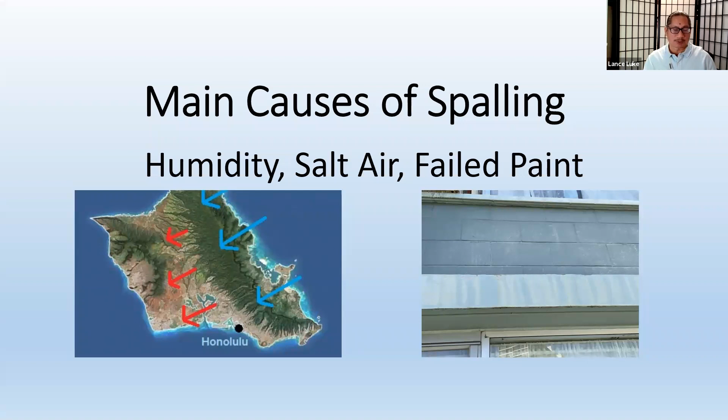So how do we determine whether there's spalling of the buildings, or let's say we know there's spalling, but how do we determine how much spalling there is and what the cost is to repair the spalling? So there's what's called a condition survey, and the survey is a method to determine the quantities of spalls at a particular building. And there's different ways to do surveying, and it's kind of simple on one hand, and on the other hand, it may not be so simple.

But the objective is to get a good snapshot of the condition of the building with respect to the various spalling conditions. So once all these spall areas are identified, those are all quantities, and we put all the quantities together, add them up, and we can determine basically what the cost is by the number of quantities for different types of spalling. So let's talk more about that.

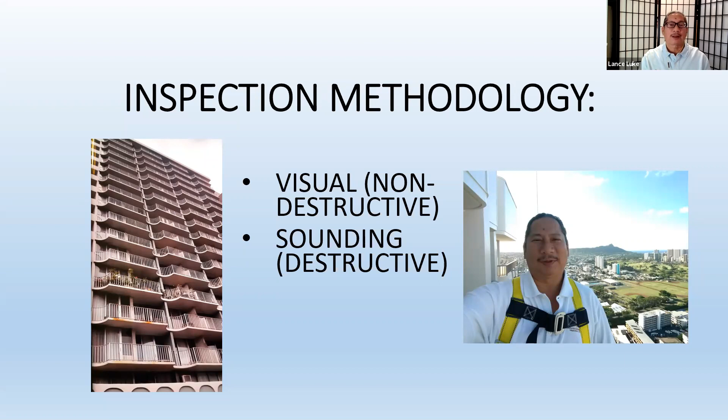So we gather all this information and compile the results and total everything and come up with an approximate number. Now, I'm not the contractor that does the work, but when I manage construction projects, I do my own estimate. So when I do get the contractor's proposals, I can gauge whether they're far off or whether they're within the ballpark based on what my own number is. So it's like a cross check. If I don't do that, I'm not going to have a clue whether these numbers from the contractors are correct or they're way off. Okay, so we're going to compile all the results and we're going to come up with some numbers.

So right now, let's take a tour of a building to see how we gather the data on spalling concrete. So this is kind of like a field trip within a webinar. So types of spalling by location. And believe it or not, there's different locations and types of spalling. And this is where the fun comes in so that you guys know what we're talking about. And when the contractor bids, you know exactly what he's bidding on and what he's talking about. And it's not Greek and it's easy to understand. My webinar is not a technical engineering type webinar, although the same contents of this webinar could be presented in a 4-hour session at the World of Concrete show. But I made it so that it's easier to understand for the average layperson that is not into construction.

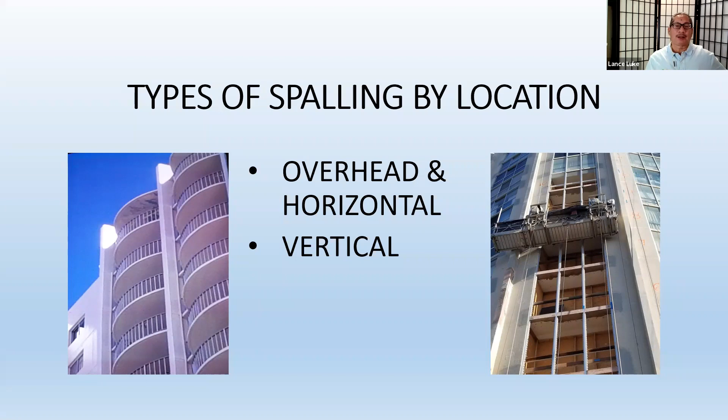The other type of spalling by location is a vertical spall. And instead of having it flat, whether it's a walking surface or a ceiling, it's actually a vertical surface. It's the vertical plane of the building. If you look at the photo on the right, you can see those little vertical rectangles on either side of the unit opening. Those are vertical spall repairs. And so that's the terminology of overhead, horizontal, and vertical. Now, what do you call it if it's horizontal, but it's at the edge where your railing is? Okay, good question.

Okay. Now there's two different types of horizontal spalls, and one is called a partial depth, and the other is called a full depth. Now it's pretty obvious, but you take a 4-inch or 6-inch walkway concrete slab, and if the spalling repair doesn't go all the way through, in other words, it's maybe the first inch or first 2 inches of the surface, horizontal surface, that's called a partial depth repair. Why? Because it's only partial, it's not total and full.

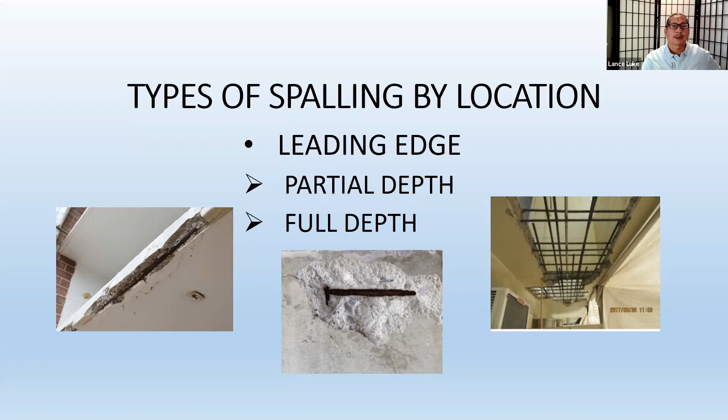There's also a rebar replacement. If you look on the photo on the right, in the middle, the rebar on this column is severely corroded, and it would require replacement. So the replacement on this rebar would have to cut it out and put a brand new piece of rebar in its place. And I'll talk to you more about rebar in a couple minutes.

Also, CMU block. We have block walls. You have a block wall, and there's cracks in that, and it's spalled. So we would need to repair that as well. And by the way, some older apartment buildings, office buildings are made of CMU block and not solid concrete. But spalling repair is basically treated the same way with respect to figuring out what the cost is. The method to do the spall repair is a little different on each item.

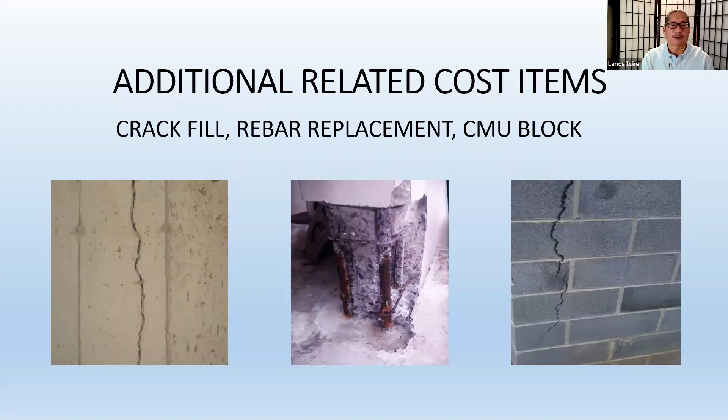I think I missed one. Okay.

Now you have aluminum railing, which is not solid, it's hollow. And a lot of times the railing bases get loose and there's spalls around the base of the railing. So we have what's called a drill and fill, where we drill holes in the base of the railing and inject a filler material so that water can't build up on the base.

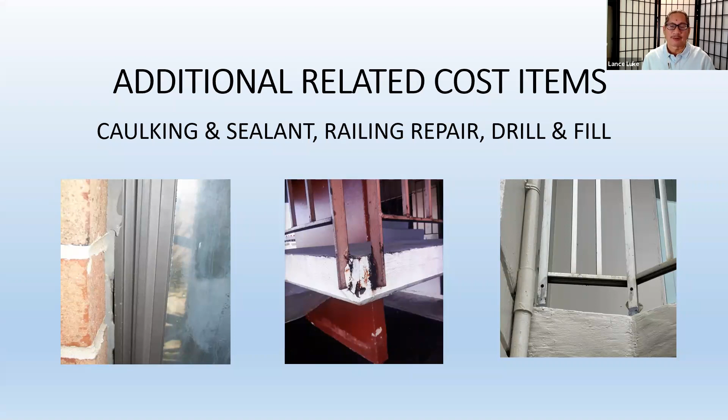Because what happens is, even if rain doesn't get in, over time there's humidity that builds up in different temperatures and there's condensation. So there's water actually sitting on the base of that railing post embedded in concrete. And therein lies the problem where the water starts damaging the concrete and there's spalling right at the bases. So it's pretty common to have spalls where the railing bases are, and that's where your leading edges are of your lanais.

Let's talk a little bit about base bid versus unit costs. Okay, so let's say we have contractors go to our building and say, take a look at our spalls. We want to get your proposals. So the contractors, let's say you call 3 contractors, they come in, they look around, and then you get a proposal from them. Okay, beware of the lowest bidder because it may not be as it seems.

And the lowest bidder, the price could be low, and that bidder could be the lowest bidder because he bid on a lower quantity than the other bidders. So common sense dictates that the low quantities result in a low bid. Okay, now I'm not saying do not take or accept the lowest bidder as your contractor. What I'm saying is to be aware of the bids. It has to be apples and apples. It cannot be an apple and a lemon when you're comparing the bids. And this is very valuable information that contractors may not tell you.

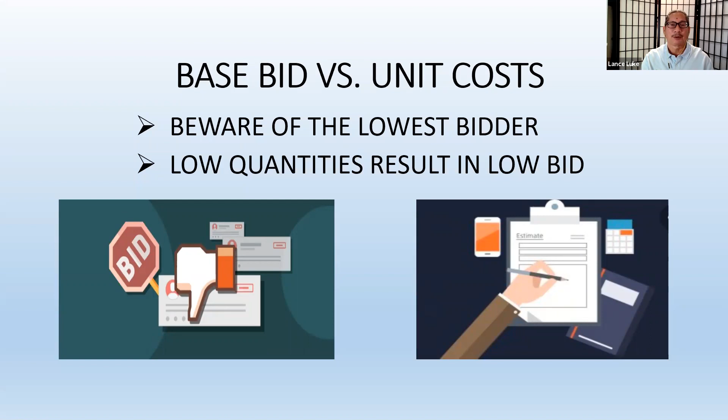So let's say we have 2 contractor proposals, and which one is the lowest proposal? Okay, good. Someone said, "Oh, wait a minute. Can't you count, Lance? You said 2 contractor proposals, but you have 3." Okay, good catch. The reason why I say 2 is because contractor number 3 was too lazy and he didn't want the job, and he just arbitrarily bid high because he's too busy, and he figures that if he gets it, he gets it, and he can make plenty profit. So basically, I threw that one out. So there's only 2 valid proposals.

And by the way, the contractor number 3 even admitted it. He says, I don't really want the job, but instead of not turning in a bid, I just made a bid high. I know I'm not going to get it, but if I do get it, then I'll make plenty of money. Okay. Well, I said, thank you. Good attitude. So contractor 1 bid $150,000 and contractor 2 bid $250,000.

So if you were the owner of the building, or you're the condo board, you're a board member of a condo, which one of these proposals would you take? Number 1 or number 2? Which is the lowest proposal? Well, naturally, the lowest proposal is number 1. Okay. So the board gets together and says, we're going to accept proposal number 1 because it's the lowest bidder. And they don't have any consultant. Okay.

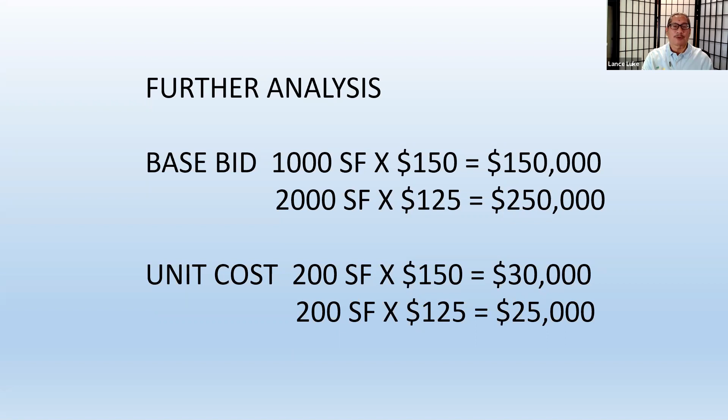Let's talk about concrete specifications. And this is another important factor. So you don't just have the contractor go there, chip out concrete, and then patch it with new concrete that he bought at the hardware store. That's why it's critical to have specific concrete repair specifications. There's industry standards, which is general acceptable industry standards, and there's various associations that's specific to concrete

repair and concrete construction. There's American Society of Concrete Contractors. There's American Concrete Institute, ACI. There's ICRI, International Concrete Repair Institute. And when I see bad concrete, I cry.

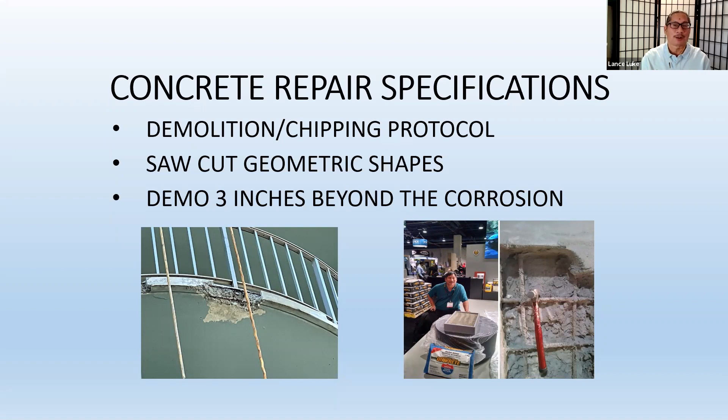Good thing." So if you look at the photo on the right side is what mine looked like when I was partly done. So in order for me to inspect concrete, I got to be able to know how it's done. So that's the reason why I entered the contest. Well, I also wanted to win $1,000.

Okay, so some more concrete repair specs. There's rebar replacement protocol. What is a protocol? When do we know when to replace the rebar? Well, if you look at the photo on the left, the rebar is severely corroded. If you look at the rebar right at the end, and you hold it and you're looking at the end of it, that's called cross section. If you're looking right on, and if the cross section is corroded away 15% or more, that's a determination that you have to replace the entire rebar.

You can't save it. Don't grind it and try to save it because you're cheap. That's not going to do it. Also, you have to remove all the corrosion on the rebar. If you look at the photo on the left, if you just use a metal grinder and grind all the rebar that you see and it's shiny, is that good enough?

No, you have to chip behind the rebar so that you could go behind the rebar with a brush and apply corrosion treatment. If you do not chip behind the rebar and you just patch the top, in 2 years, the corroded rebar in the back will start spalling concrete again, and then you're back to square one.

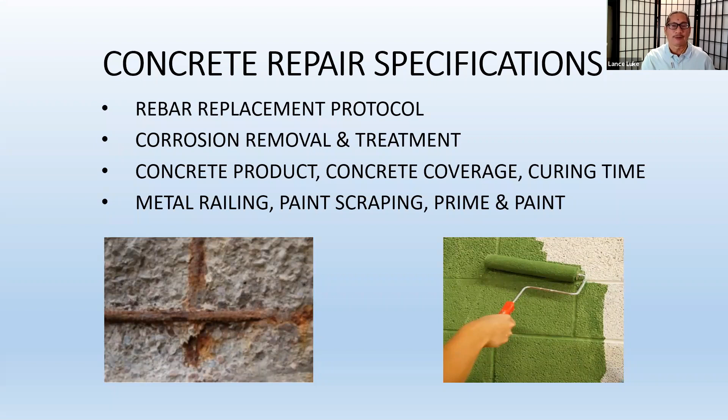By the way, I'm not happy with that green color. It's like an army worm green. I don't like it. I don't know about you guys.

Proper contract documentation. You don't just hire the contractor, he goes and fixes it, and he goes, here's the bill. Okay. So here's what you should require at every spalling project. You should require, in addition to documentation of the areas that need to be repaired, a photo beforehand, a photo during the spalling repair, and a photo after.

So if you look at the photo on the left, it's obvious that there's a horizontal crack there. It's a leading edge spall right at the base of the railing. And this is a photo as is before any work's done.

Then they started chipping out the area, and this is a close-up of the same area showing the rebar where they cleaned it up. So it looks pretty good. Okay, although there's still some concrete cracks around there, they got to dig it out some more. And then they formed it and they poured concrete.

So the photo on the right is after they took out the form of the concrete so we can see the repair. What is critical is the before and during, because the during is going to have the photo showing the condition of the actual spall area, and they have to take measurements in order for me to cross check how much they're billing for. Okay.

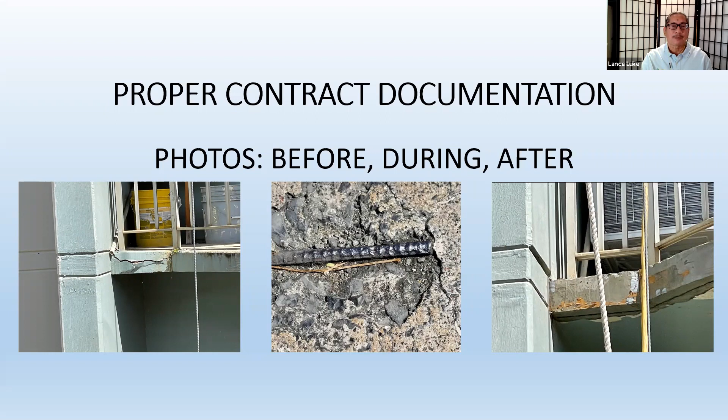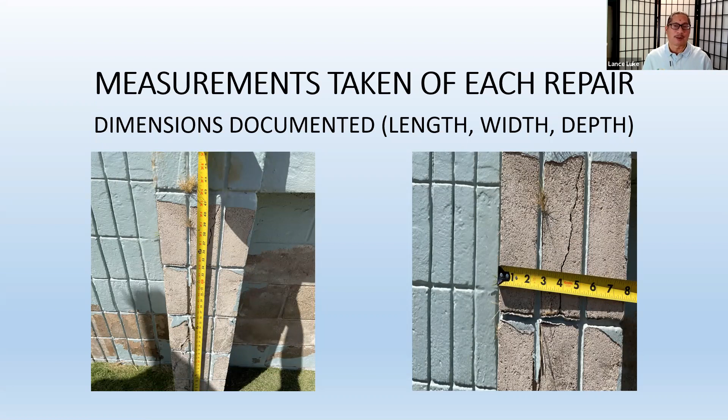Okay, this is full documentation of a spall repair. This is the right way to do it. If a contractor doesn't submit all this documentation, how do you know they're not overcharging you if you can't prove for each spall area how much concrete they took out and how much they patched? Okay, you don't know.

Also, description of location, spall type, drop number, stack number, and condo unit number. So when they're doing the repair, they need to list what the unit number was, what the type of spall. So unit 201 leading edge spall was 3 linear feet, times X amount per linear foot. And I double check all that.